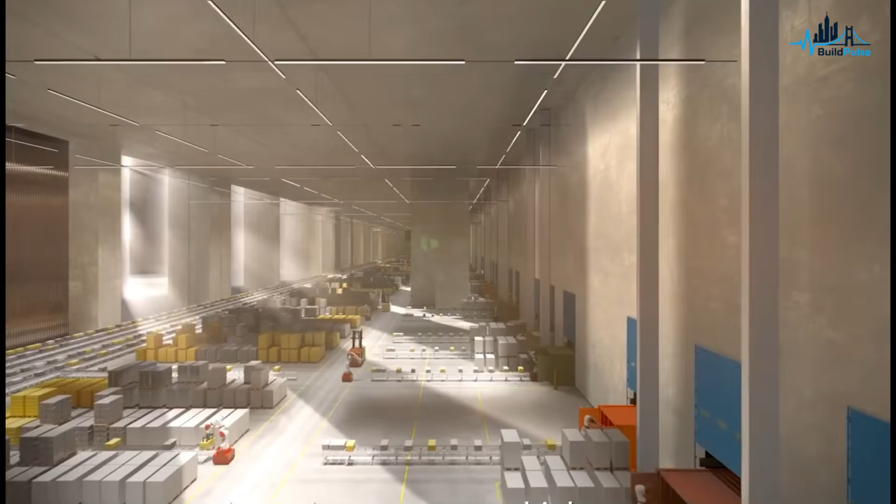Imagine trying to build a futuristic city in a place where the first problem is not traffic, it is not housing, it is not skyscrapers, it is water. For years, NEOM has been sold as one of the boldest construction visions on Earth.

But every render hides the same question: where does the water come from? Because in this part of the world, water is not something a city simply receives from nature. It has to be produced, powered, moved through long pipelines, stored, recycled, monitored, and protected. And whatever is left behind has to be controlled before it damages the very sea that made the whole project possible. That means NEOM's most important megaproject may not be the Line. It may be the invisible machine beneath it.

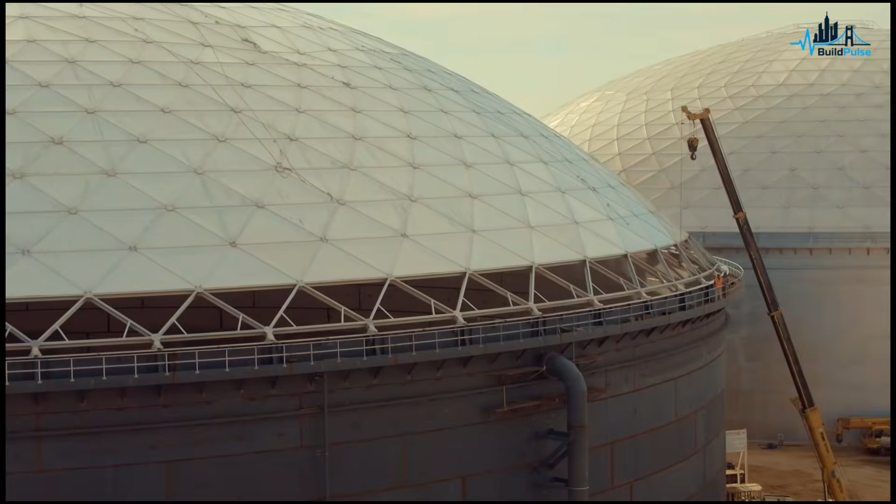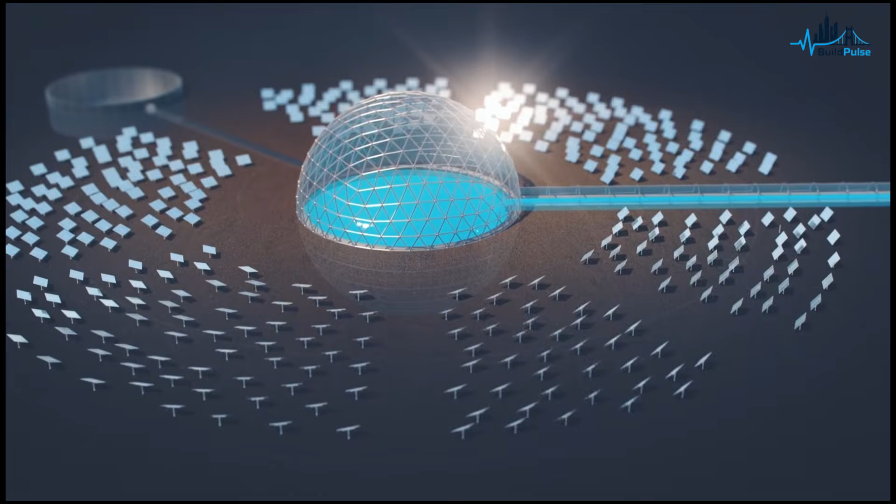Desalination plants, renewable power, reservoirs, pumping stations, wastewater recycling, and brine treatment. And if that machine falls behind the city's ambition, the future does not simply slow down, it runs dry. This is the story of NEOM's $500 billion desert city, and the water system that decides whether it becomes a model for the future or the world's most expensive mirage.

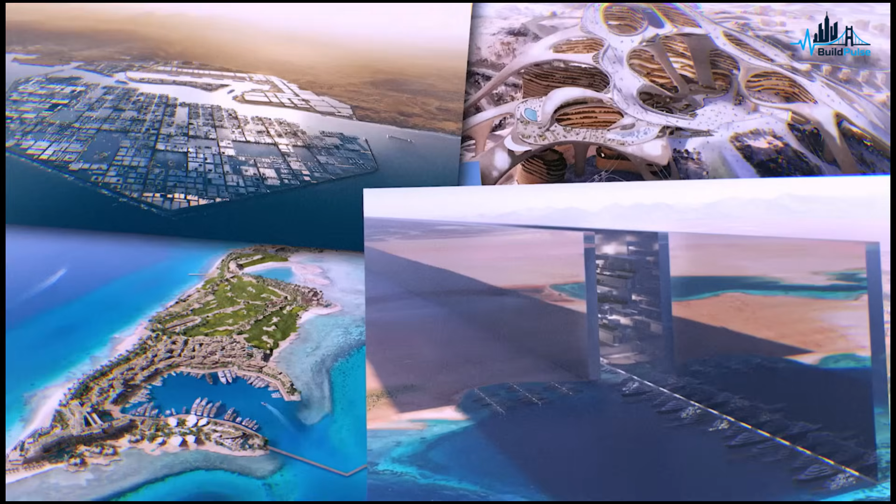Before we get into the system, we have to separate the dream from the plumbing. NEOM is not one building, it is not even one city. It is a planned region on the northwest coast of Saudi Arabia along the Red Sea, designed to include several major developments: the Line, Oxagon, Trojena, Sindalah, Magna, and the infrastructure needed to connect them. The most famous piece is the Line, a proposed linear city stretching 170 kilometers, only 200 meters wide, and rising 500 meters above sea level. It is the image everyone remembers: two mirrored walls cutting through the desert like a blade.

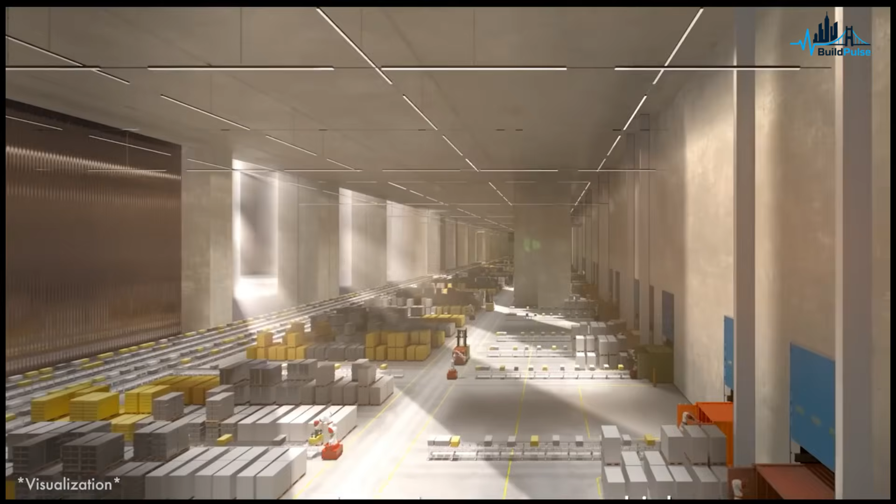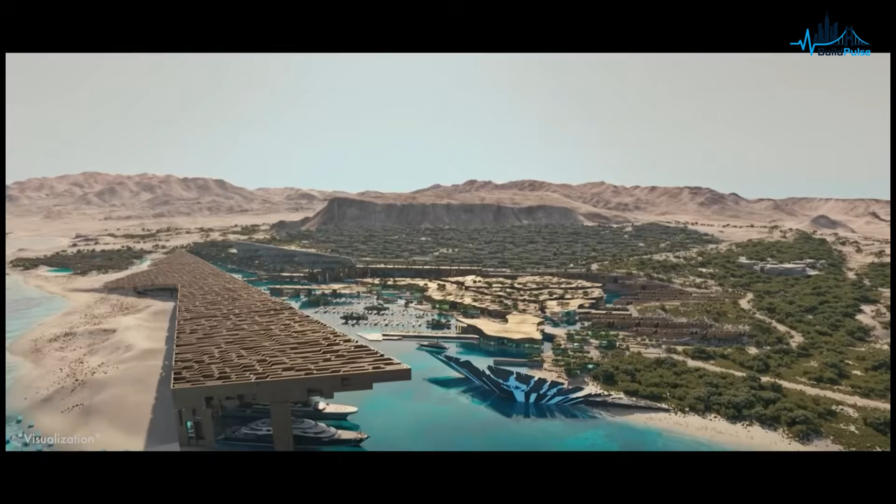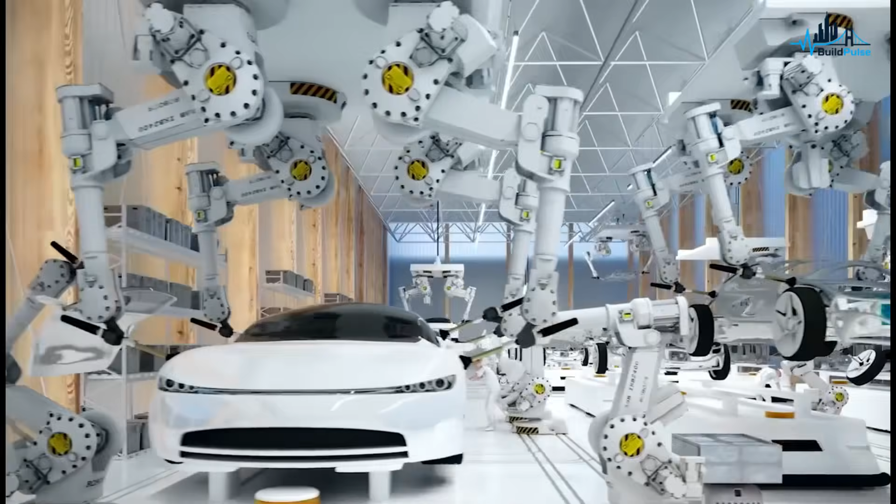But NEOM is bigger than that single image. It includes industrial zones, coastal tourism, mountain development, ports, energy projects, airports, roads, utilities, and a whole new economy that Saudi Arabia wants to use as part of its post-oil future. The marketing language is seductive: renewable energy, walkable neighborhoods, zero-emission transit, artificial intelligence embedded into daily life, advanced manufacturing, a new relationship between cities and nature.

But all of that depends on something much older than any smart city: a reliable water cycle. And this is where NEOM's story diverges from almost every traditional city. Most cities grow around water: rivers, aquifers, reservoirs, lakes, seasonal rainfall, snowmelt, or regional supply networks usually arrive first, and the city organizes itself around them. Even cities in dry climates often inherit something: groundwater reserves, imported water systems, older reservoirs, or decades of existing pipes.

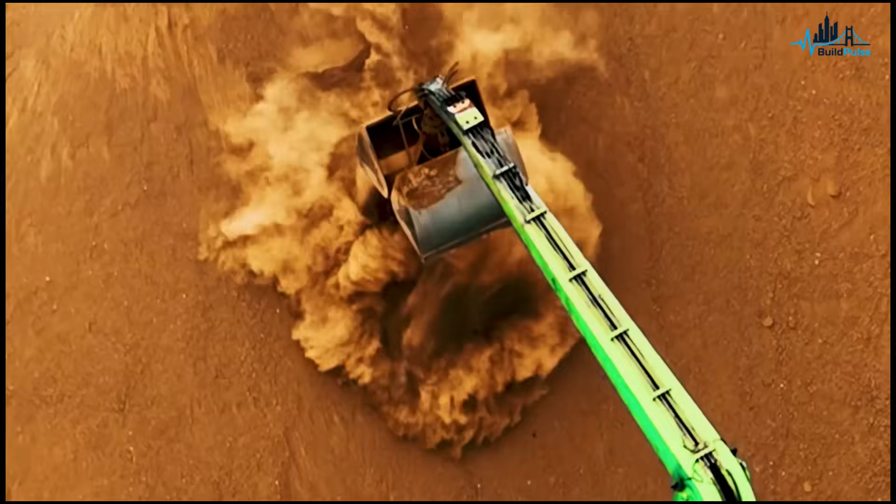NEOM is different. It is being built in one of the driest regions on Earth, where natural freshwater is extremely limited. Rainfall can be measured in only a few dozen millimeters in many years, and there are no permanent rivers to build around. So the water plan is not a supporting document inside the master plan. It is the master plan.

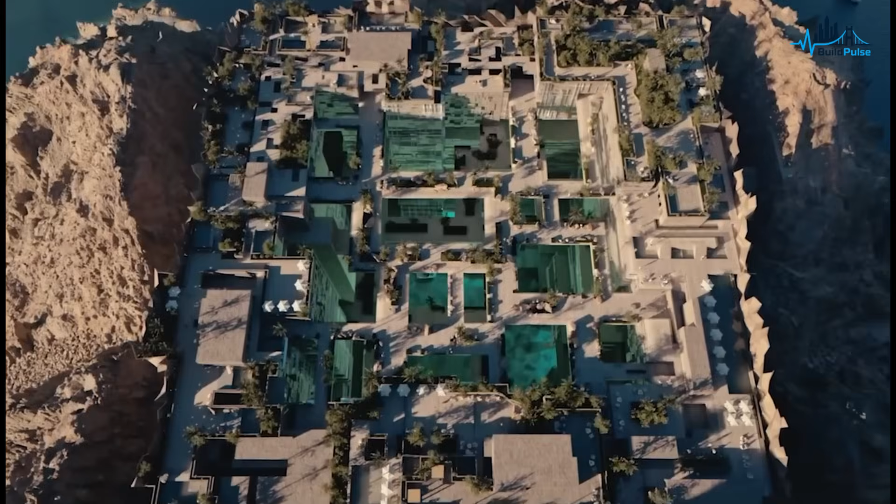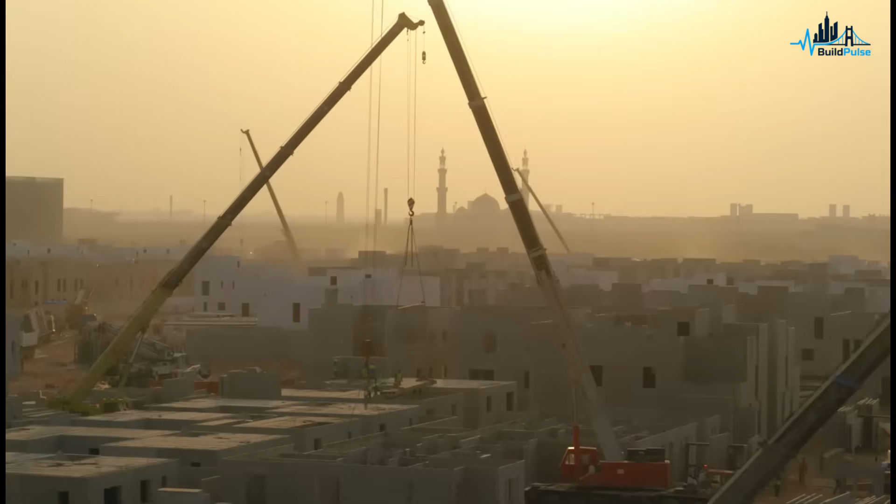Because a city can postpone a museum. It can delay a district. It can redesign a tower, cut a hotel wing, or move a stadium entrance. But it cannot negotiate with daily water demand. The moment people move in, hotels open, construction work accelerates, and industry starts operating, the system has to behave like reality, not like a plan in a book.

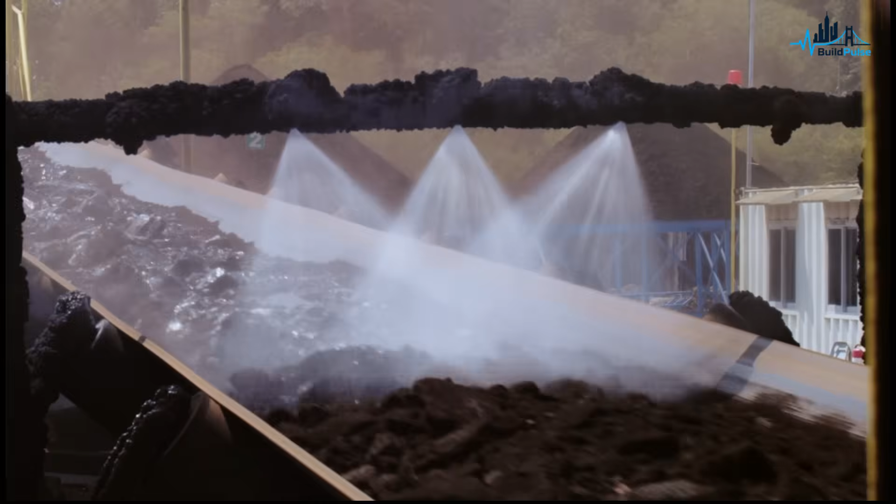The taps have to open. The toilets have to flush. The cooling systems have to run. Construction dust has to be suppressed. Emergency reserves have to be ready before the emergency arrives.

That is why water is the perfect test of NEOM. Strip away the glass facades, the price tag, the geopolitical ambition, and the architectural renders, and what remains is a simple, ancient, unforgiving question: Can enough water be made, moved, stored, and reused reliably every day at city scale in one of the driest places on Earth?

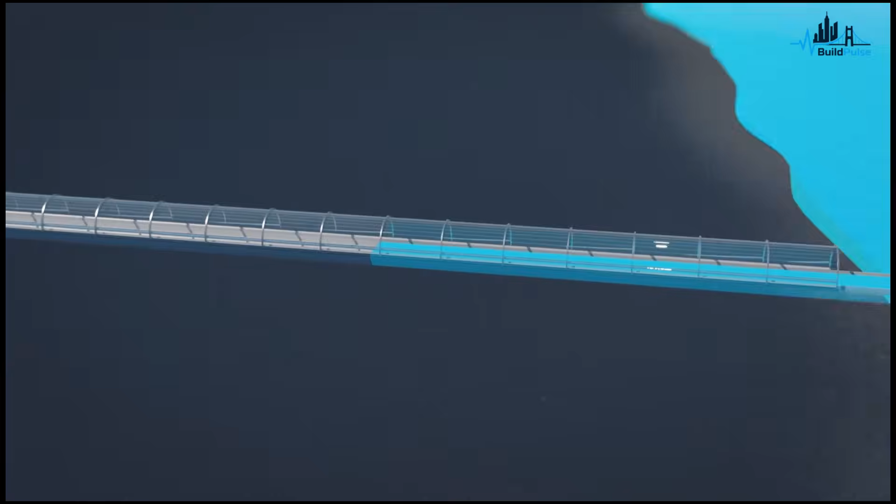NEOM cannot simply find that water. It has to manufacture it. And that is the first revelation. NEOM's water supply is not a source, it is a factory. NEOM's own water plan is built around desalination powered by renewable energy.

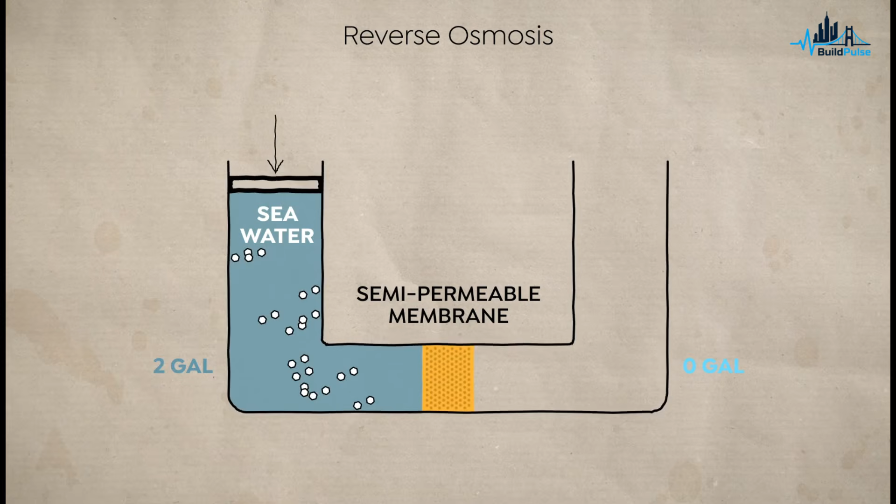In simple terms, seawater from the Red Sea is pulled into a treatment system. Dissolved salts are removed through advanced filtration and membrane processes, and fresh water comes out the other side. On a diagram, it looks clean: sea in, fresh water out, city supplied.

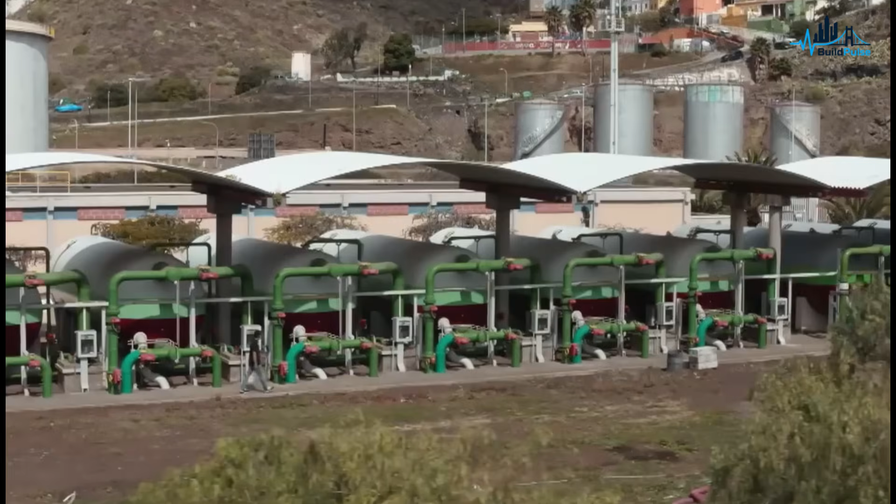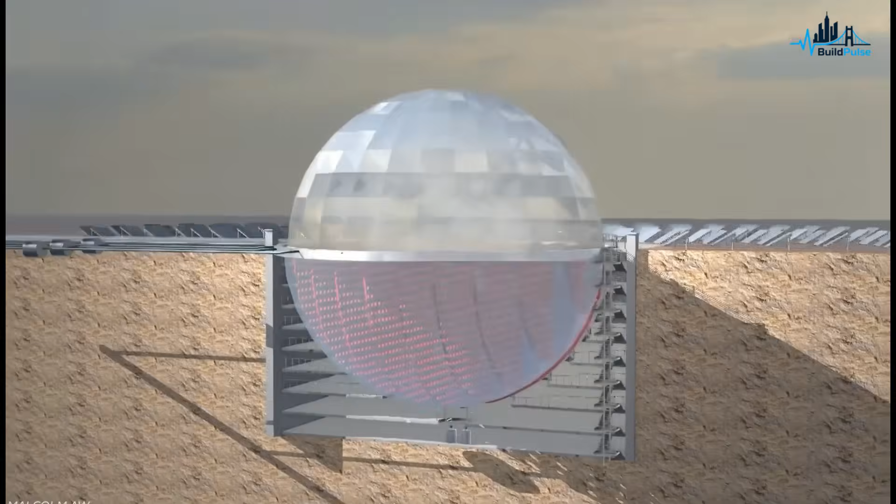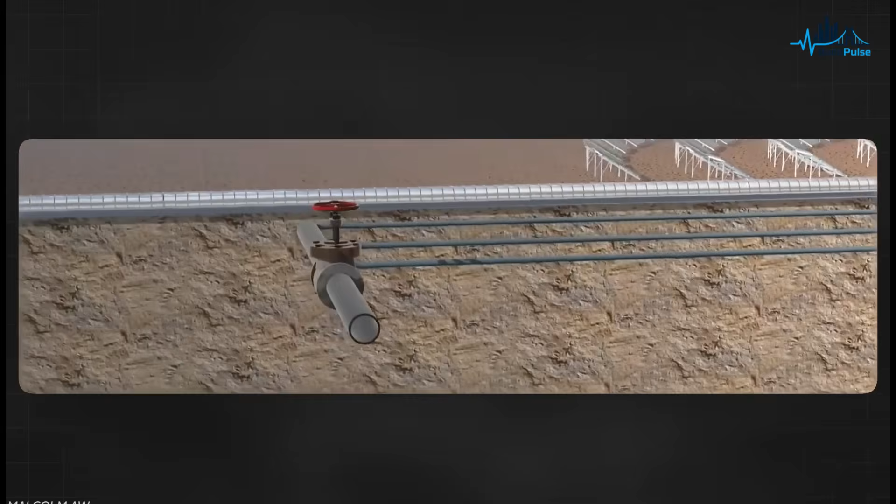But in a desert at city scale, that simple diagram becomes one of the most demanding industrial operations on the planet, because desalination is not a tap you turn on. It requires intakes that bring seawater in while limiting marine damage. It requires membranes, pumps, filters, chemicals, operators, monitoring systems, spare parts, maintenance crews, and continuous power. Then the finished water has to be moved inland through pipelines, pumped through pressure zones, held in reservoirs, protected from contamination, and delivered with enough reliability that a failure does not become a crisis.

And then comes the part almost nobody puts in the render: brine. When you remove salt from seawater, the salt does not disappear. It becomes a concentrated leftover stream. And if that stream is handled poorly, it can raise local salinity near the discharge point and stress marine ecosystems.

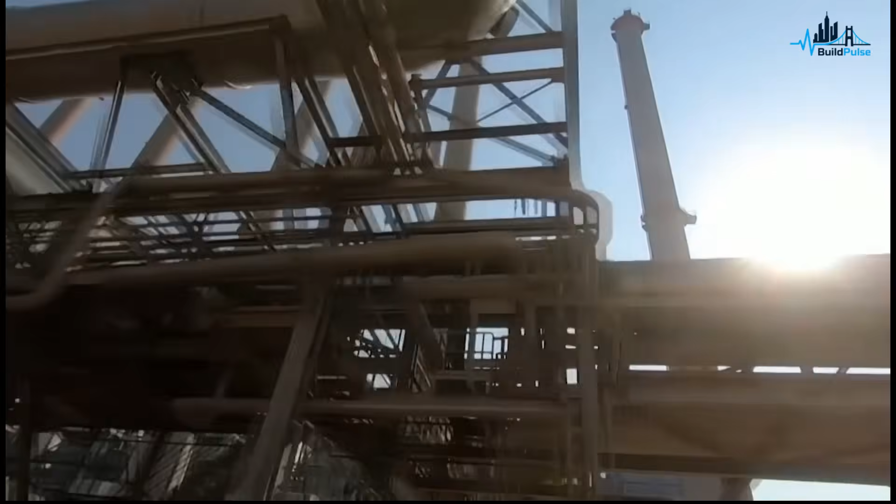That matters because NEOM is not drawing from an empty bathtub. It is drawing from the Red Sea, a marine environment known for coral reefs and ecological value. So NEOM's plan does not treat brine as a detail. It treats brine as one of the central engineering problems. The idea is to process it, recover useful minerals and materials from it, and reduce the amount of waste that returns to the sea. NEOM has also promoted pilots, including brine-based concrete, and partnerships around brine valorization. That is ambitious. It is also the right problem to focus on.

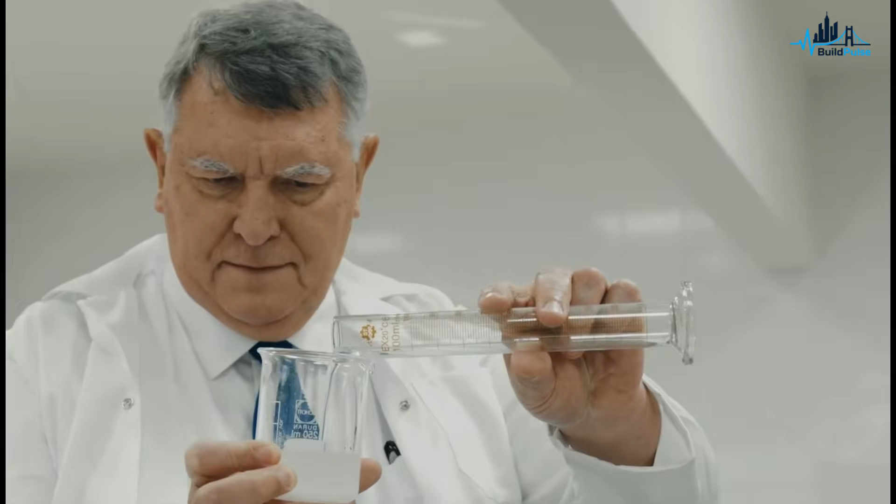Because if NEOM is going to market itself as a sustainable desert city, it cannot simply copy the old model of desalinating water and pushing the difficult part out of sight. It needs a cleaner loop.

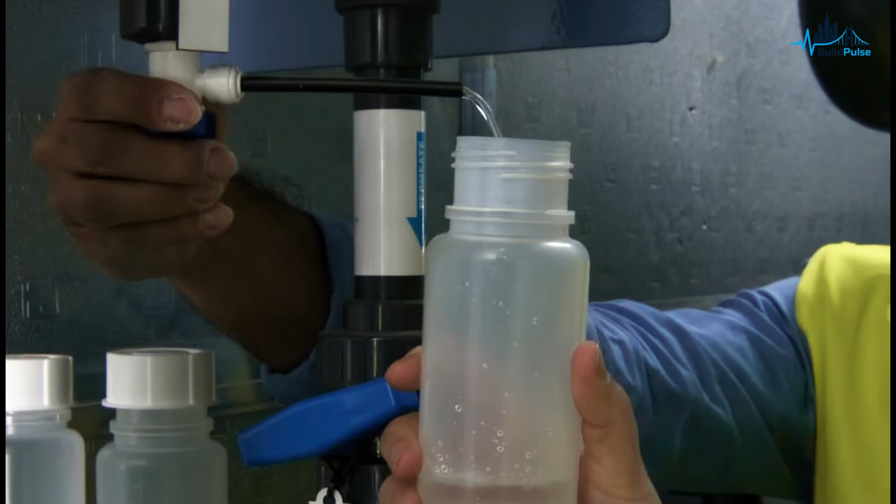That loop has 4 steps. First, make fresh water from seawater. Second, power the process with renewables. Third, recycle wastewater back into useful water. Fourth, manage or recover the brine so the Red Sea does not become the hidden cost of the city.

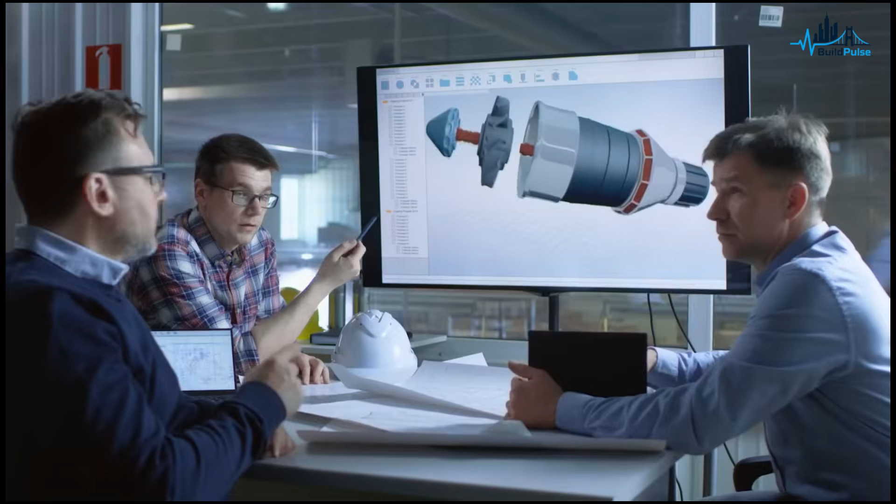If those 4 steps work, NEOM becomes a laboratory for future arid cities. But if one fails, everything gets harder. Because here, water is not just another utility. Water is life support, and life support has to work every day.

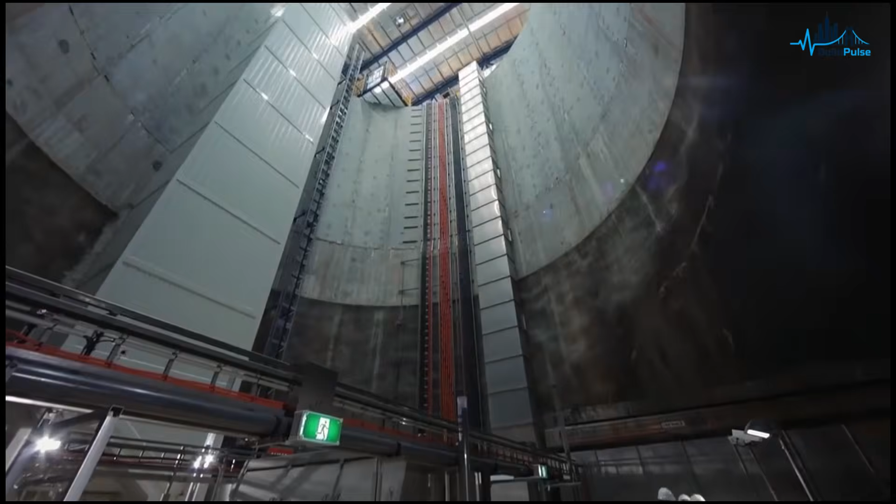That brings us to the second layer of the problem. Saudi Arabia already knows desalination. The kingdom is one of the world's great desalination powers, and desalinated water already supplies a major share of its domestic drinking water. So the question is not whether Saudi engineers understand how to remove salt from seawater. They do. The real question is whether NEOM can build a new version of desalination that is larger, cleaner, more integrated, and synchronized with a city that is still changing shape.

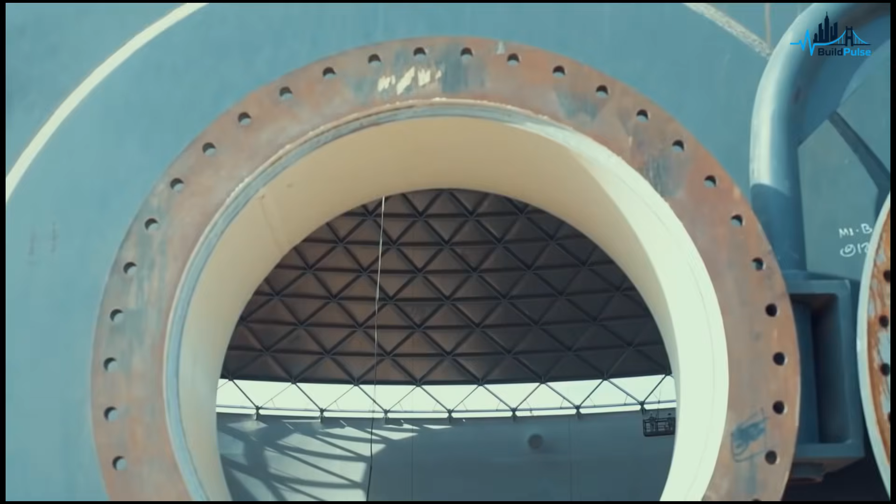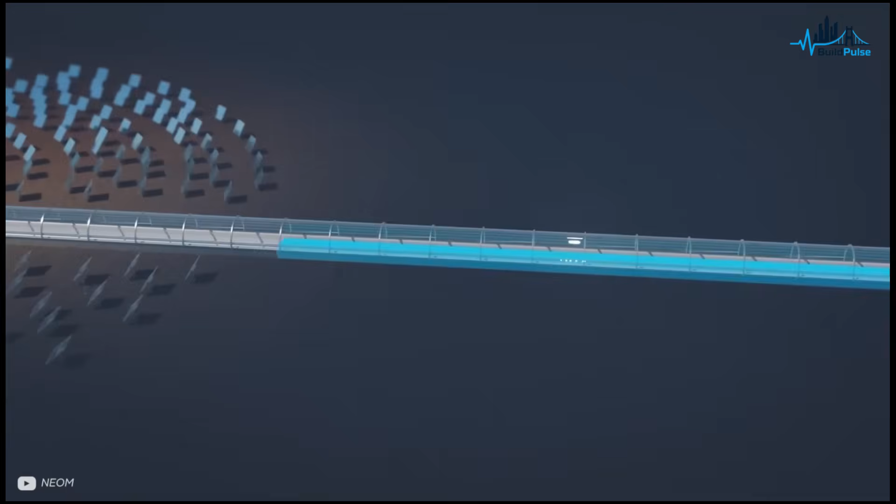That is much harder. The numbers are huge. NEOM has described a smart water network stretching hundreds of kilometers from coast to desert, major reservoirs, pumping stations, wastewater recycling, and brine processing built into the system from the beginning. It has also reported real progress: transmission pipelines already laid, storage assets built, pumping stations installed, and potable water production already operating.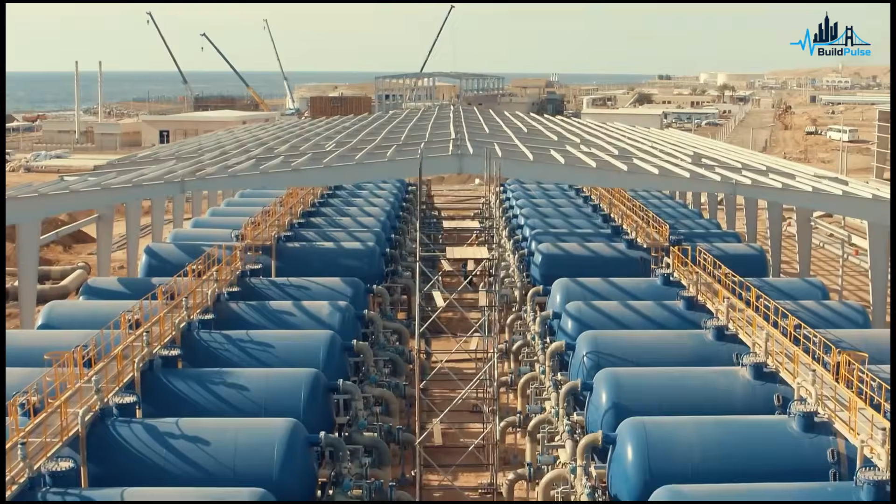So this is not just a concept slide. Parts of the water machine exist. But the distance between what is operating today and what a populated city demands tomorrow is the real story.

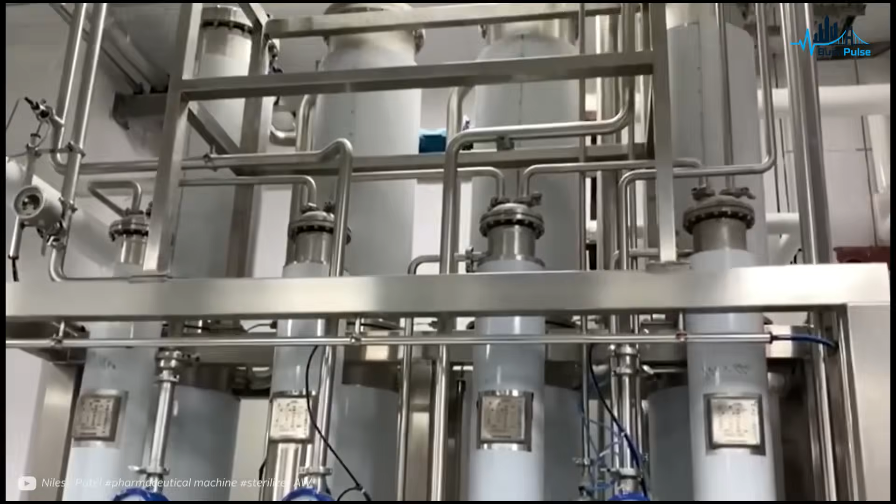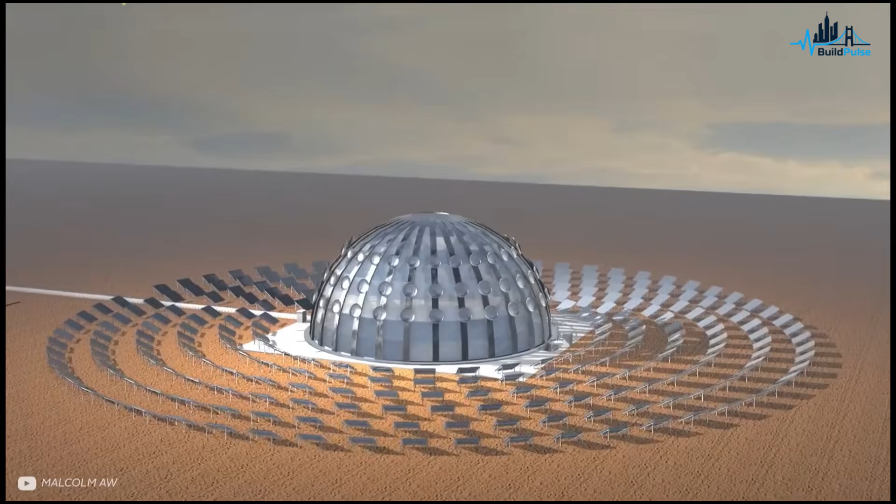A desalination-dependent megacity needs 3 things at once. First, it needs continuous power. If power supply falters, water production can falter with it. Renewable energy is not just an environmental promise here, it becomes the fuel line for daily life.

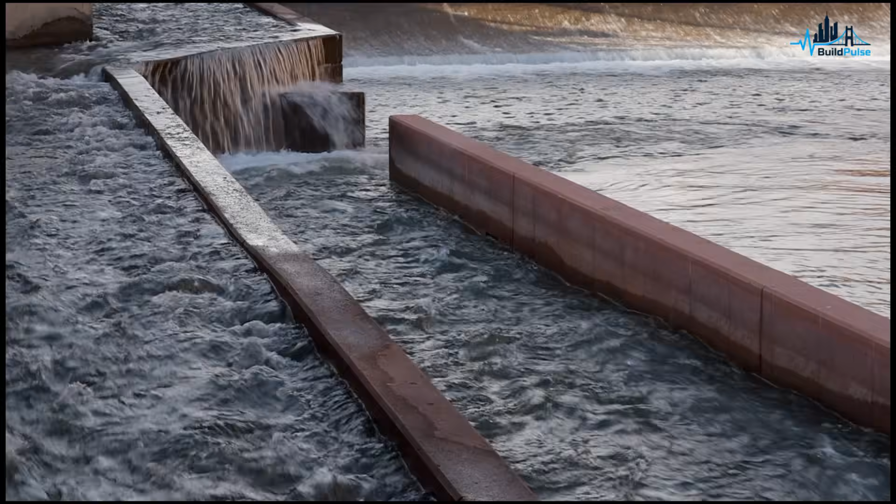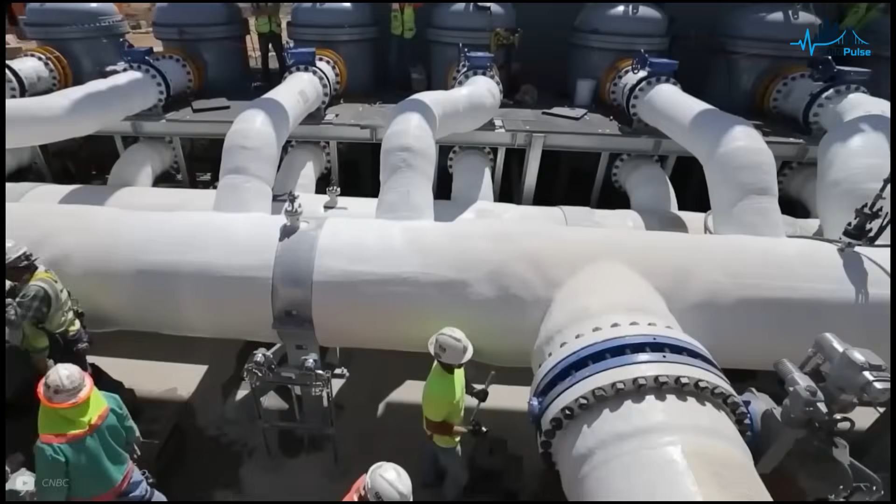Second, it needs redundancy. A normal city may be able to absorb failure through older networks, backup reservoirs, or regional water transfers. A new desert city has to design its safety margin from the start: storage reservoirs, alternate routes, spare capacity, emergency pumping, and the ability to isolate a failure before it cascades.

Third, it needs timing. Water infrastructure has to arrive before demand does, not alongside it, before it.

But megaprojects are always tempted by visible progress: the towers, the stadiums, the hotels, the transit systems, the images that prove momentum to the world. Pipes are not that image. Reservoirs do not go viral. Brine processing plants do not sell the dream. But without them, the dream is fragile.

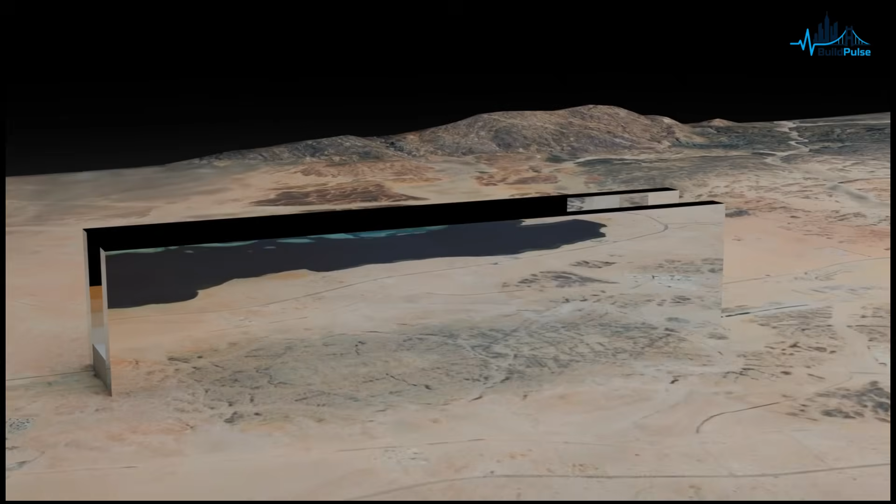That is why recent reporting around NEOM matters. The long-term image of the line is a 170-kilometer city for millions of residents. But reporting has described a much smaller initial focus, with work concentrated around an early stretch and major event-linked deliverables. That does not mean the whole project is dead. It means the project is entering the discipline phase, and water infrastructure is where discipline becomes unavoidable.

Because water does not care about master plans. It only cares whether the capacity exists when demand arrives.

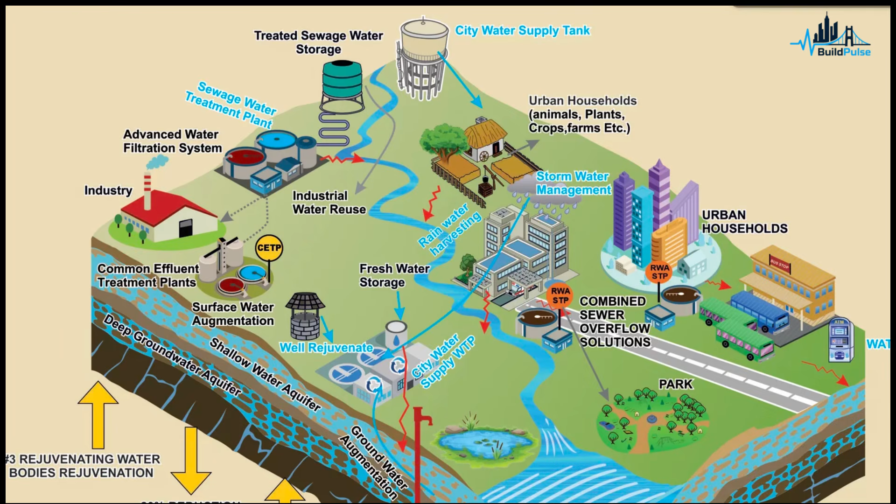Now there is a second revelation hiding inside the shape of the line itself. Even if NEOM can make enough water, it still has to move that water through a city shaped like a spine. A traditional city is messy, but it is usually clustered.

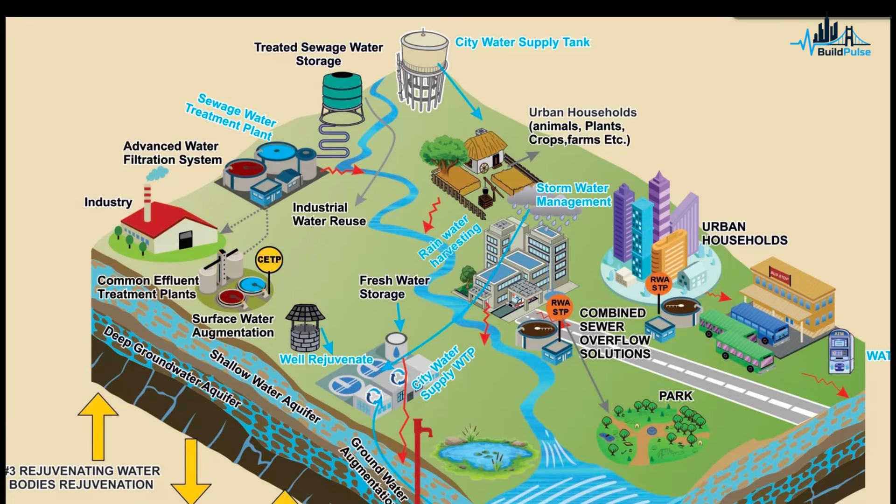Water mains branch out, loop around neighborhoods, and create a network. If one area fails, another route may help. If demand spikes in one district, nearby systems can sometimes support it.

The line is different by design. It is long, narrow, and linear. That geometry may save land. It may concentrate services. It may create new possibilities for transit, density, and energy distribution.

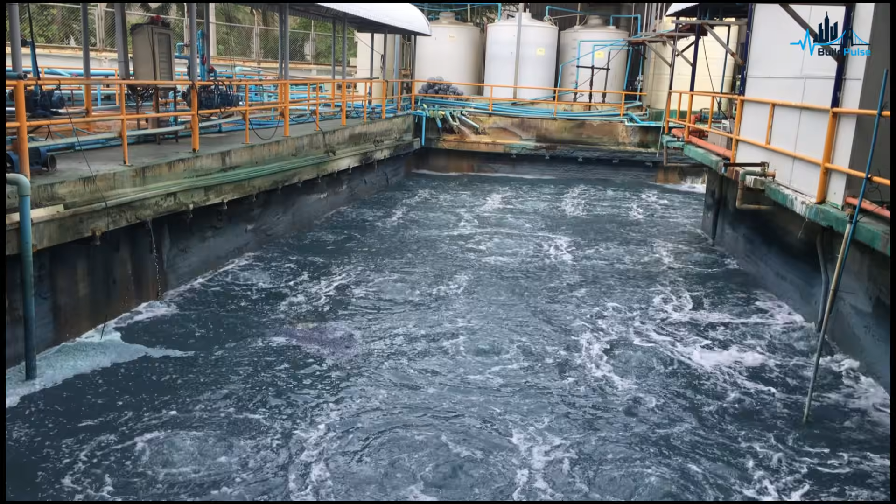But for water, it creates a supply chain problem. Imagine feeding a city through a long body. The source is near the sea. The city stretches inland. Every segment needs pressure, storage, monitoring, fire flow, drinking water quality, wastewater collection, and recycled water networks.

A failure at one point is not just a local inconvenience. It can become a severance.

So engineers need a spine with backup arteries. They need district storage nodes. They need pressure zones. They need sensors that can find leaks fast. They need valves that can isolate trouble without cutting off an entire district. And they need enough reserve that maintenance does not become a public crisis.

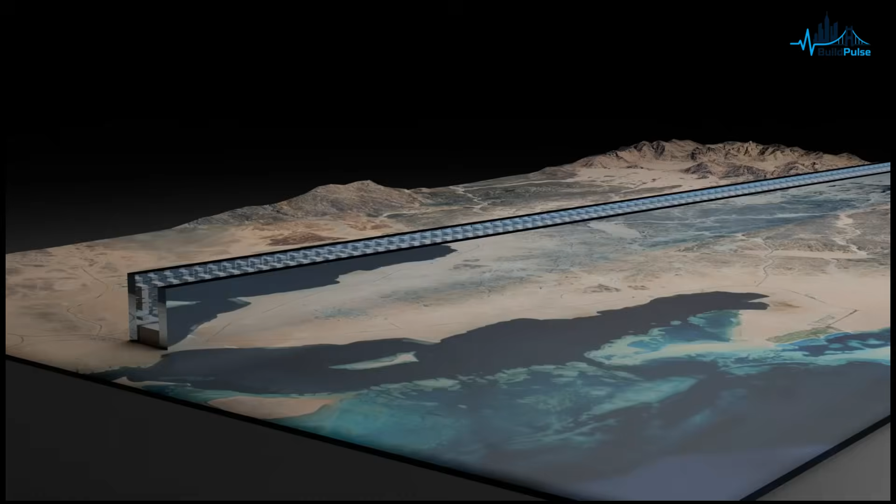This is the unglamorous side of futuristic urbanism. A linear city looks simple from the air. But under the surface, it may need one of the most carefully staged utility networks ever attempted.

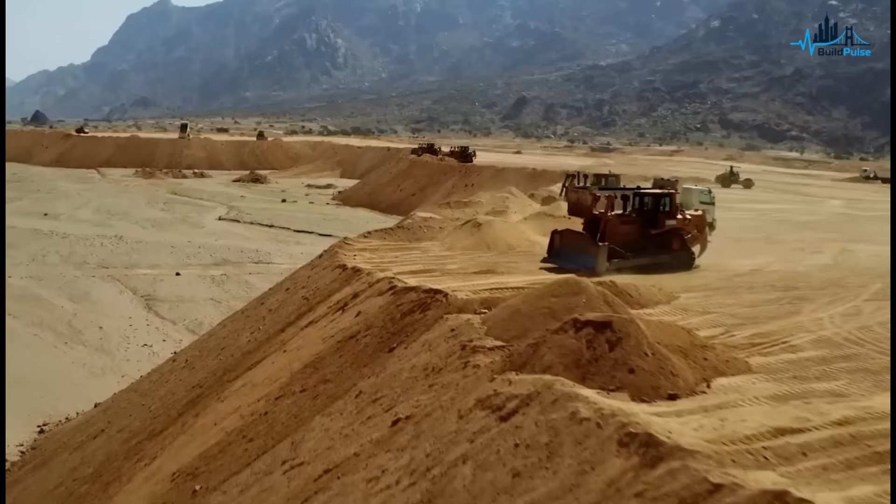And construction adds another twist. NEOM needs water before NEOM is fully inhabited. Before millions of residents arrive, construction camps need water. Concrete work needs water. Dust suppression needs water. Workers need sanitation. Equipment needs cleaning.

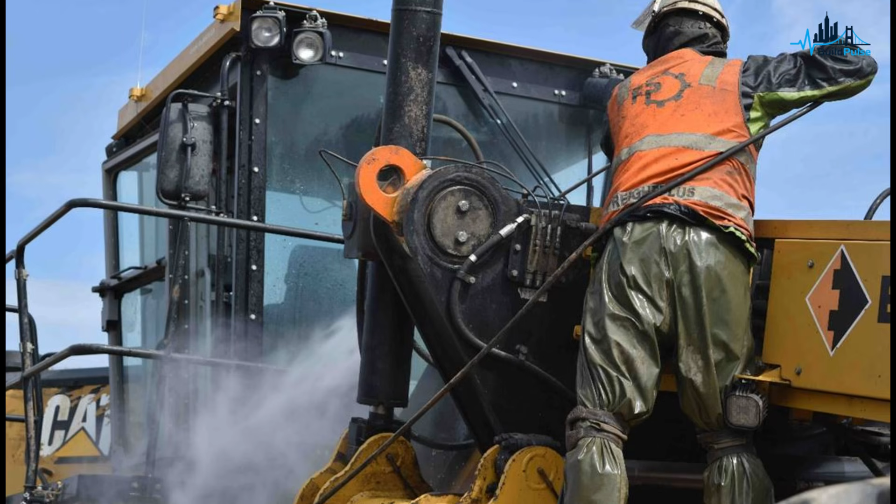Temporary roads, batch plants, landscaping trials, ports, and early tourism assets all create demand before the city produces revenue at scale. That means the water machine has to grow ahead of the city, not alongside it, not behind it, ahead of it. That is expensive even in the best conditions.

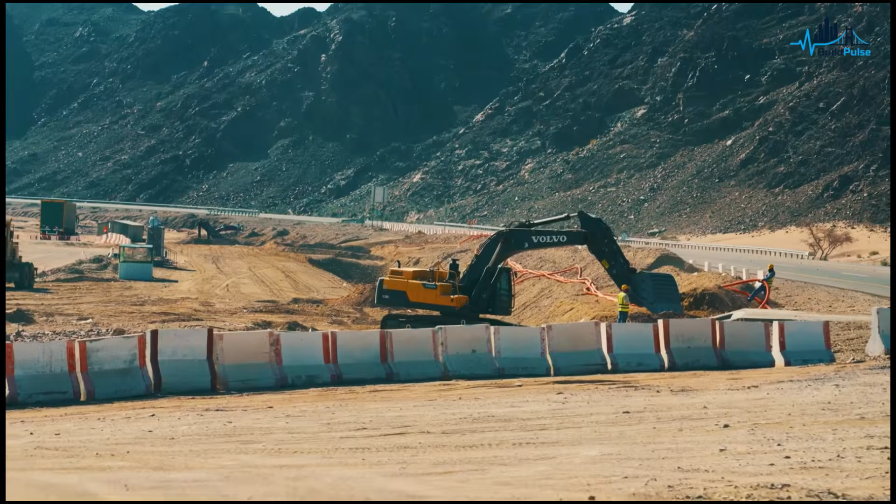In a restructuring megaproject, it becomes even more delicate because every early dollar spent on hidden infrastructure is a dollar not spent on something the public can see. But if the hidden infrastructure is delayed, visible progress becomes dangerous.

This is why recent water infrastructure reporting matters. Industry coverage in 2026 reported that NEOM had canceled a planned desalination plant known as Moonlight, which had been planned at 150,000 cubic meters per day as part of broader restructuring. At the same time, NEOM continues to promote long-term high-capacity desalination, brine processing, and water reuse goals.

Those two facts can exist at the same time. The ambition remains massive. The path is being adjusted. And for a water-dependent city, every adjustment affects the sequence.

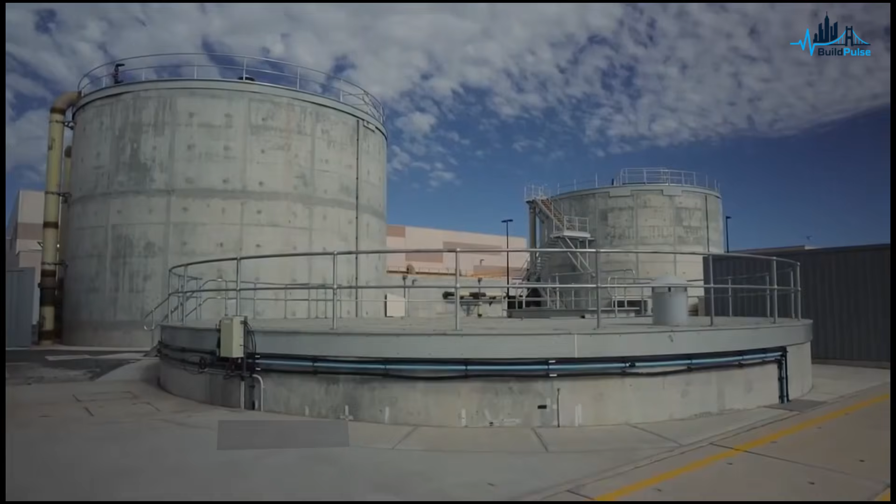That brings us to the third revelation. NEOM's greatest water risk is not that desalination is technically impossible. The technology exists. The engineering knowledge exists. The risk is simpler and more dangerous. Demand could outrun the machine.

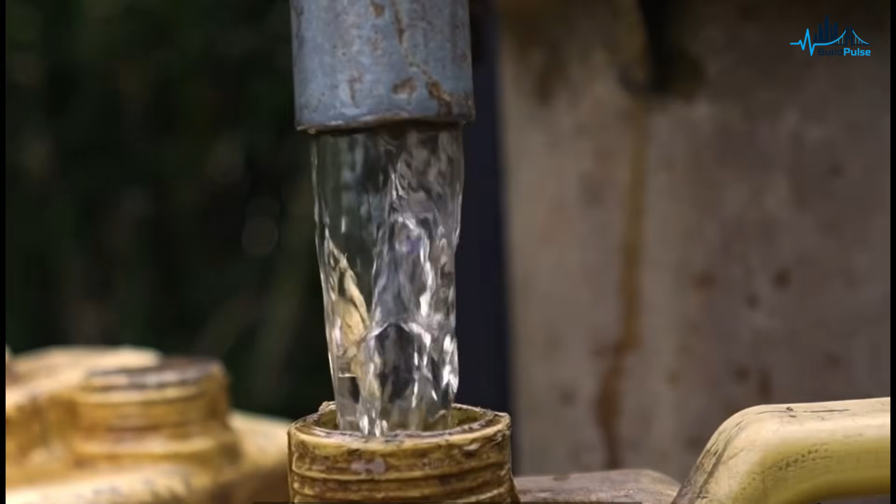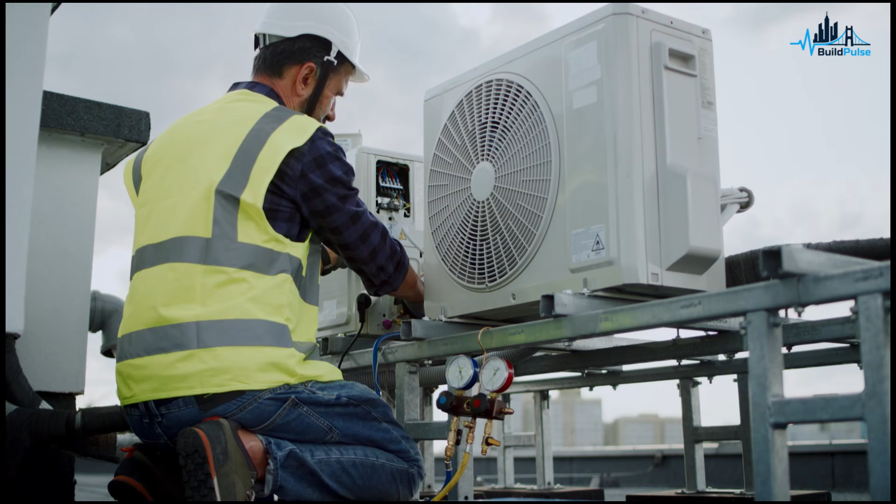Every growing city generates a demand curve. More residents mean more drinking water. More industry means more processed water. More landscaping means more irrigation. More hotels mean more cooling demand. That curve rises continuously. It does not wait.

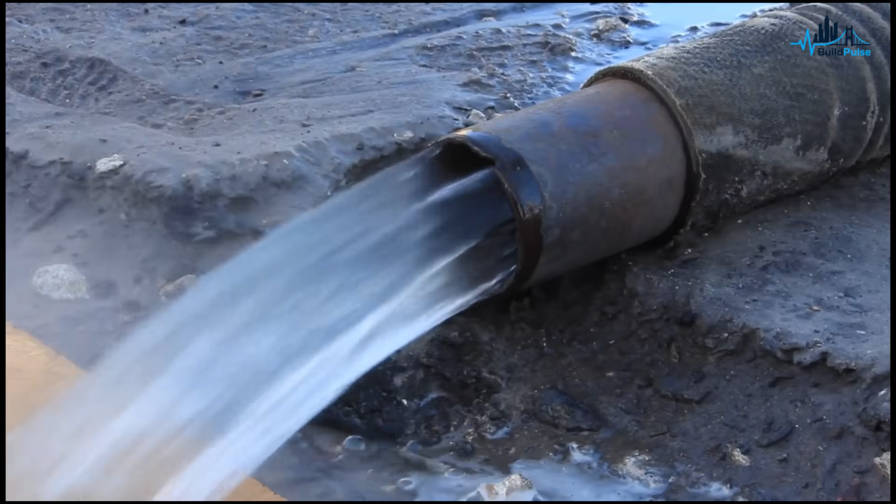But NEOM's water supply has its own curve, and that curve moves slowly. Desalination capacity has to be tendered, financed, engineered, permitted, built, tested, connected to power, connected to the pipe network, staffed with trained operators, and brought online carefully.

Power projects have to be ready, pipelines have to be laid, reservoirs have to be filled, wastewater plants have to be commissioned. Brine systems have to prove they can work beyond pilots and reach the scale of the desalination system they support. If the city curve rises faster than the water curve, the result is not theoretical.

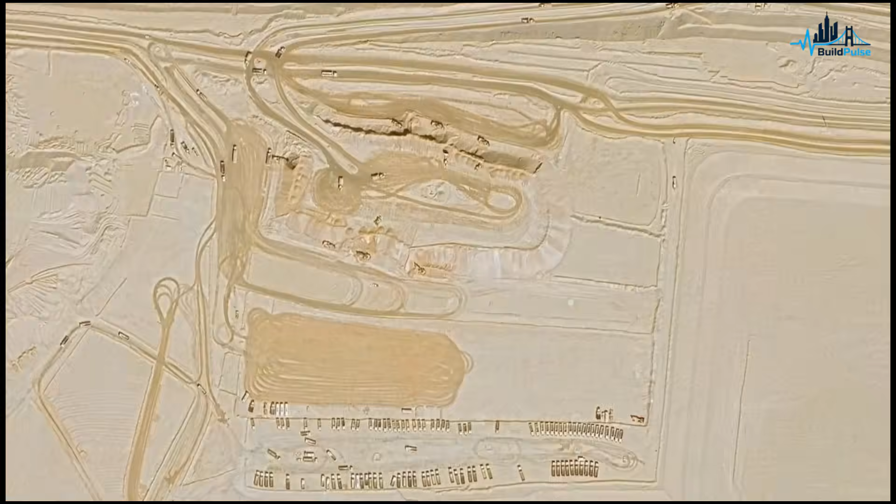It is rationing, delays, construction bottlenecks, or a forced slowdown. This is the physical wall behind the financial wall.

Money can accelerate many things. It can hire more people, buy equipment, and move deadlines forward. But water infrastructure has dependencies.

A desalination plant cannot deliver water to a district that has no pipeline. A wastewater recycling plant cannot recycle water that has not been collected. A brine recovery system cannot claim environmental success if it has not reached the scale of the desalination system it supports. Everything must connect, and everything must connect in order.

That is the engineering tension at the center of NEOM. This is why runs dry is not a prediction that NEOM has already failed. It is the pressure test. It is the question every arid megaproject has to answer before the opening ceremony.

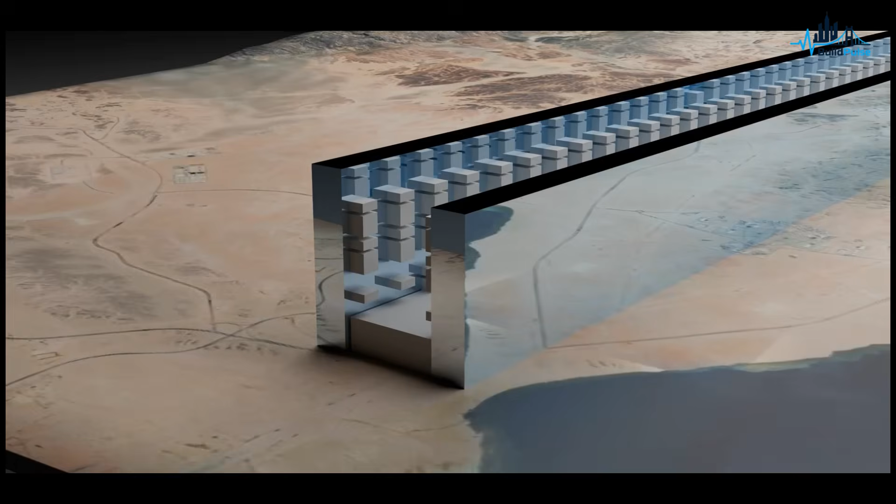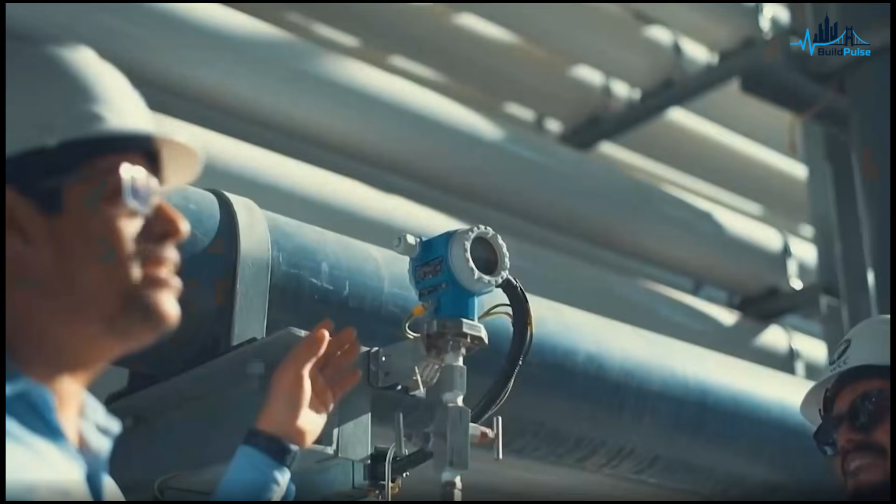Can the water system scale at the same speed as the dream, without pushing the cost into the ocean, the grid, or the next phase? The public sees the mirror wall. Engineers see the sequence: water first, power first, storage first, distribution first, wastewater first, brine first. Only then can the futuristic city behave like a real city.

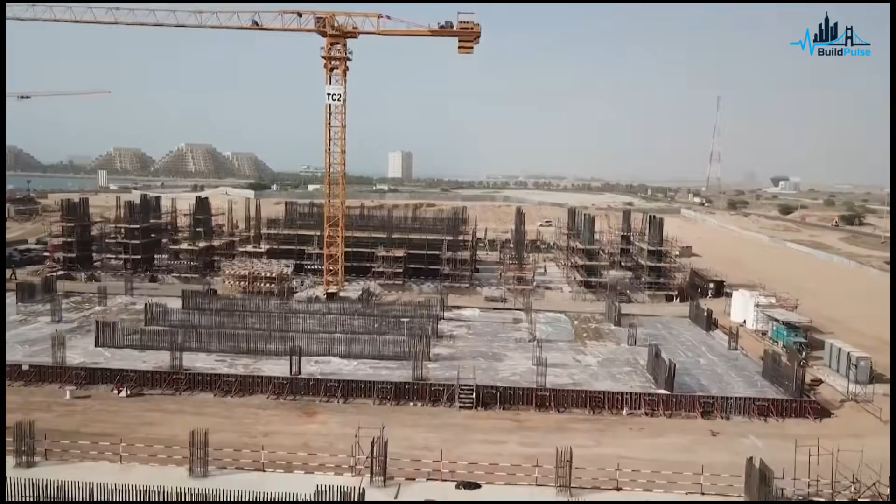This is also why phasing matters so much. A shorter first phase may make the project more manageable. It concentrates demand, reduces immediate distribution length, and gives engineers a smaller system to prove before the full vision expands. But it also changes the narrative. The question becomes less, can they build 170 kilometers quickly? And more, can they prove the first piece works well enough to justify the next piece? That is a very different test.

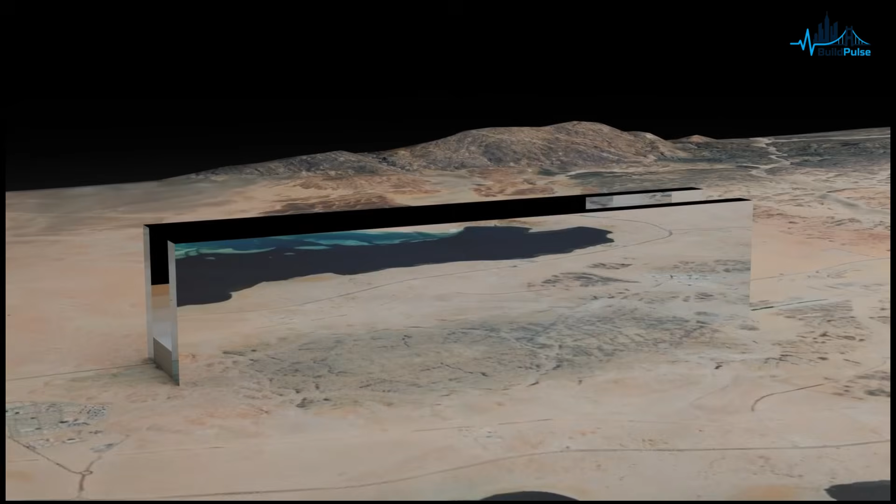There is also a public perception trap here. When people hear that a first phase is smaller, they often assume the engineering problem shrinks in the same proportion. But utility systems do not shrink that neatly. Even a short first phase needs the basic skeleton: intake, treatment, power, storage, distribution, wastewater collection, brine handling, and emergency planning. You can reduce the length of the city. You cannot remove the need for a complete water cycle. And the test is not only architectural, it is hydrological.

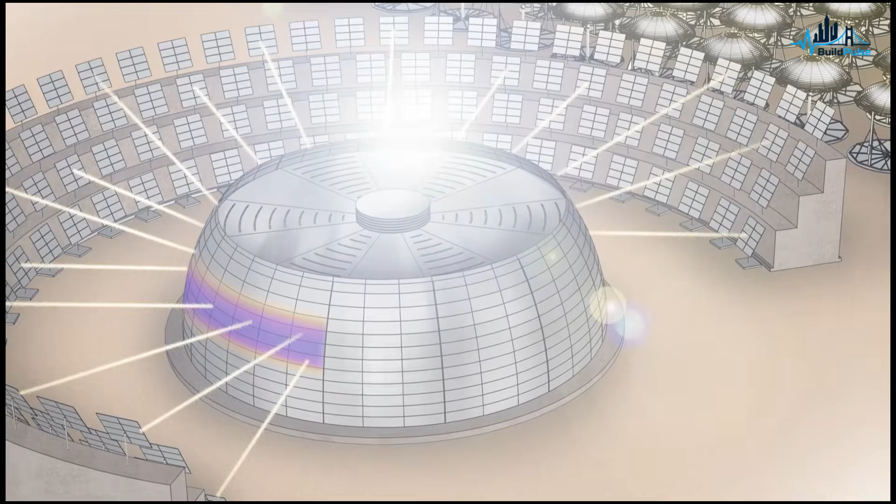Now the whole picture comes into focus. Not the vision, the system. NEOM's water infrastructure is a machine with 4 gears. Gear 1, make water. Desalination is the source. Without it, the desert city has no reliable base.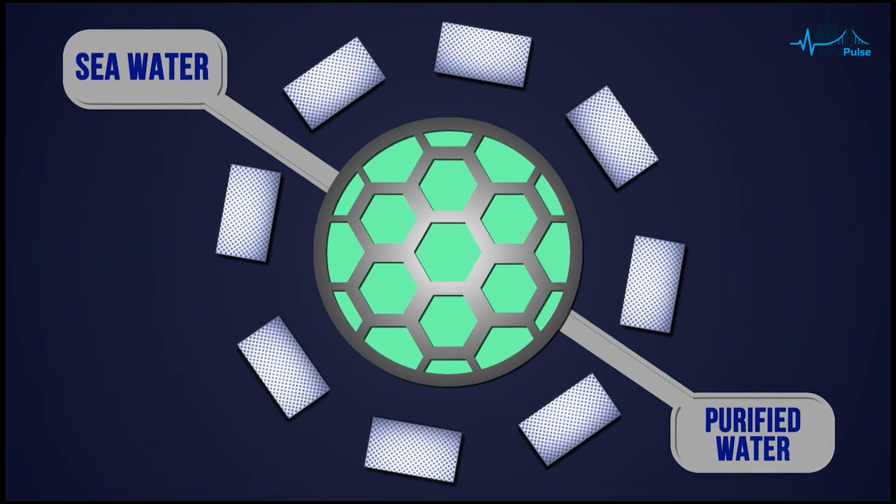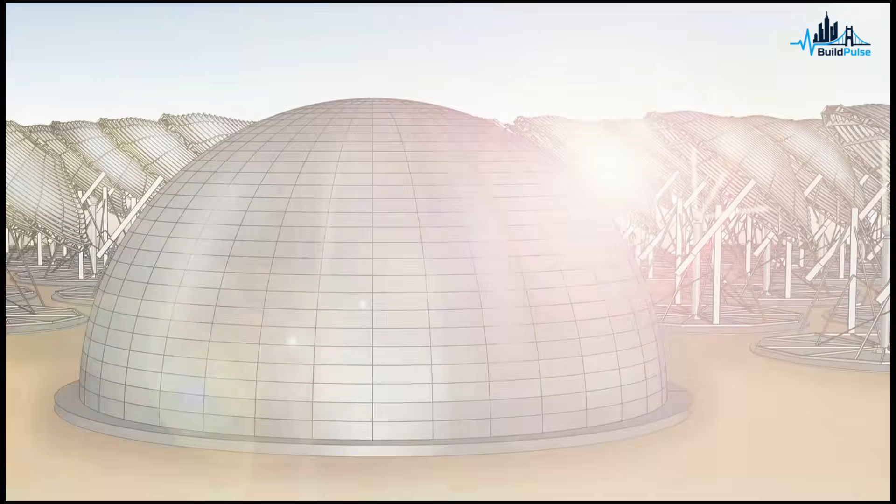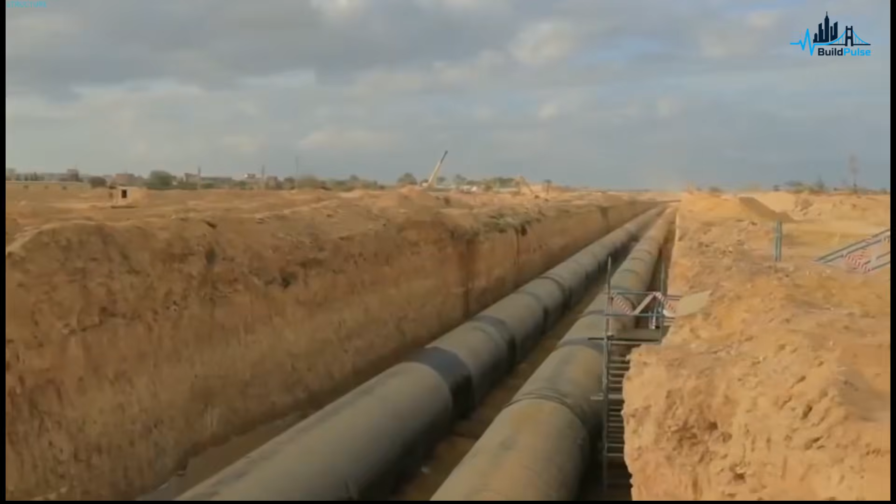Gear 2, power water. Renewables are not decoration. They keep the water stream moving. If the energy system is unstable, the water system needs storage and backup strong enough to absorb the shock. Gear 3, move water. The line's geometry turns distribution into a mega infrastructure problem.

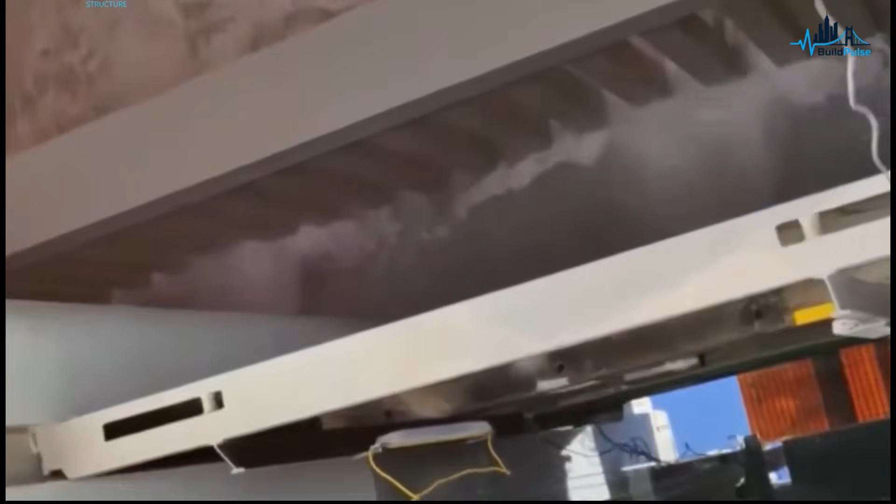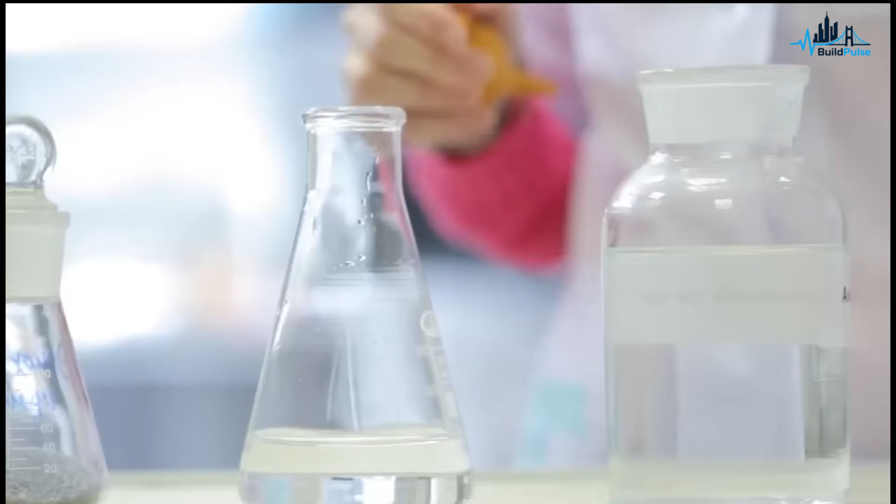Long pipes, pressure zones, pumping stations, reservoirs, valves, sensors, and redundancy. Gear 4, close the loop. Wastewater recycling and brine recovery are what turn the project from a desert survival plan into a sustainability claim. When all 4 gears turn together, the concept becomes powerful. NEOM could become a working example of how a coastal desert city can grow without draining inland aquifers, without treating the ocean as a waste sink, and without making fresh water depend entirely on old fossil fuel systems. That would matter far beyond Saudi Arabia, because NEOM is not the last desert city that will ever need water.

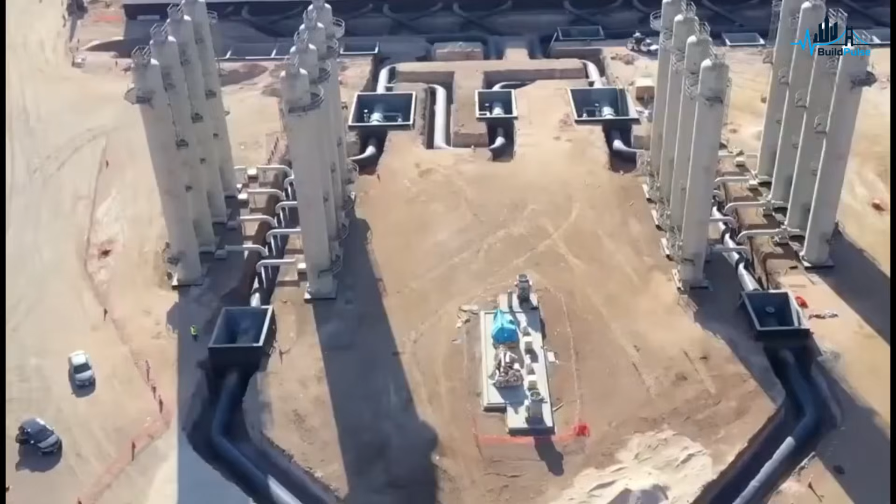But when one gear slips, the whole machine feels it. Too little power and desalination slows. Too little storage and a disruption becomes a shortage overnight. Too little recycling and demand climbs faster than supply. Too little brine control and the Red Sea becomes the price of the city. Too little phasing discipline and demand outruns capacity.

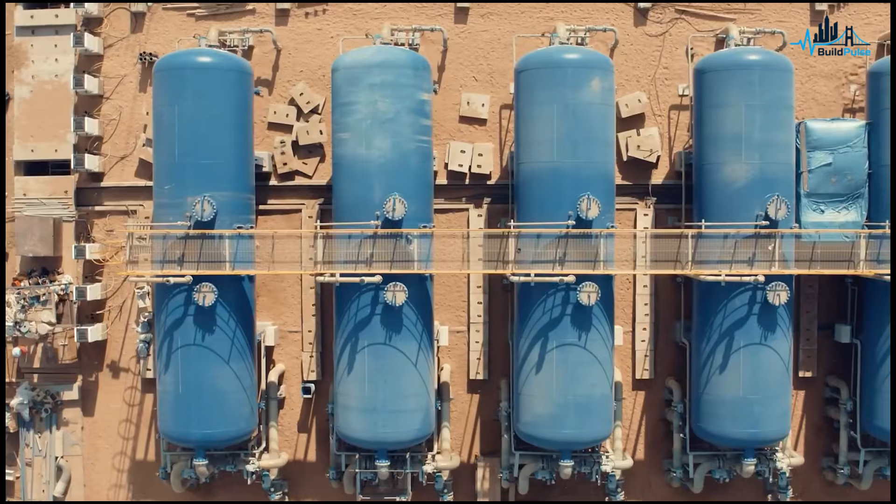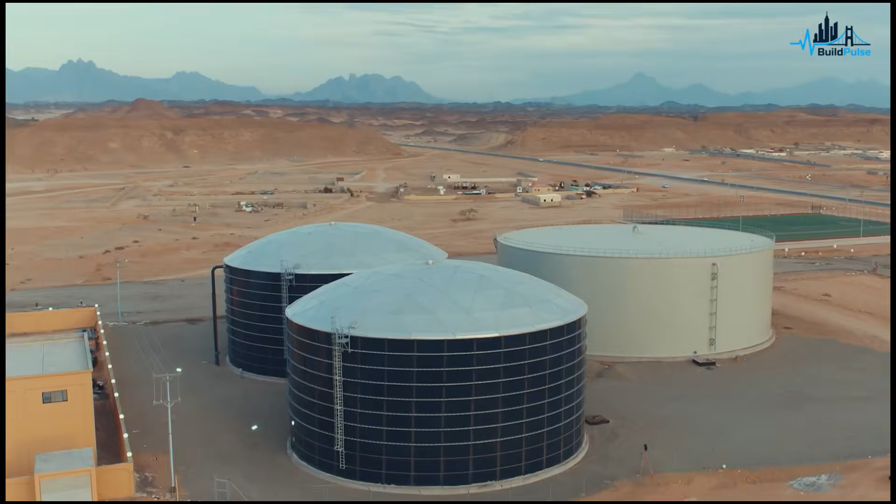That is why the real NEOM story is not just about whether a mirrored city can be built. It is about whether a man-made water cycle can be built fast enough, cleanly enough, and reliably enough to support it. The future city does not begin with a skyline. It begins at the intake. It begins where seawater becomes drinking water. It continues through pipes, pumps, reservoirs, treatment plants, and sensors. It loops back through wastewater reuse.

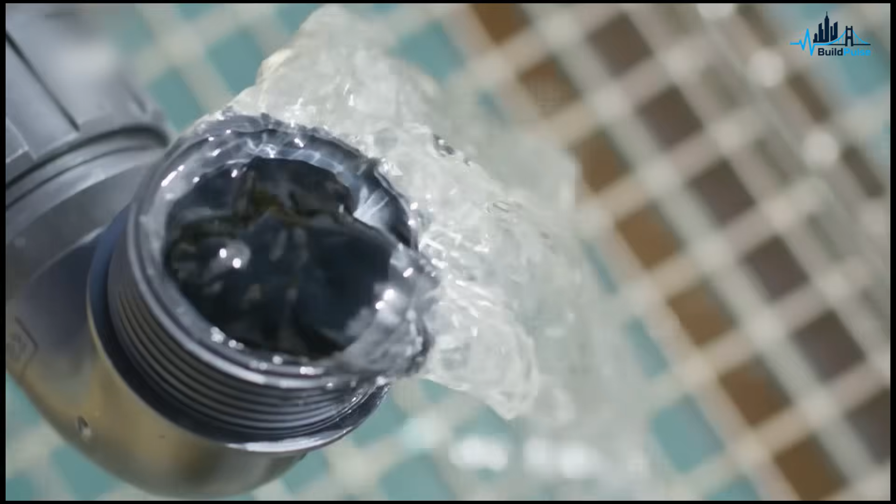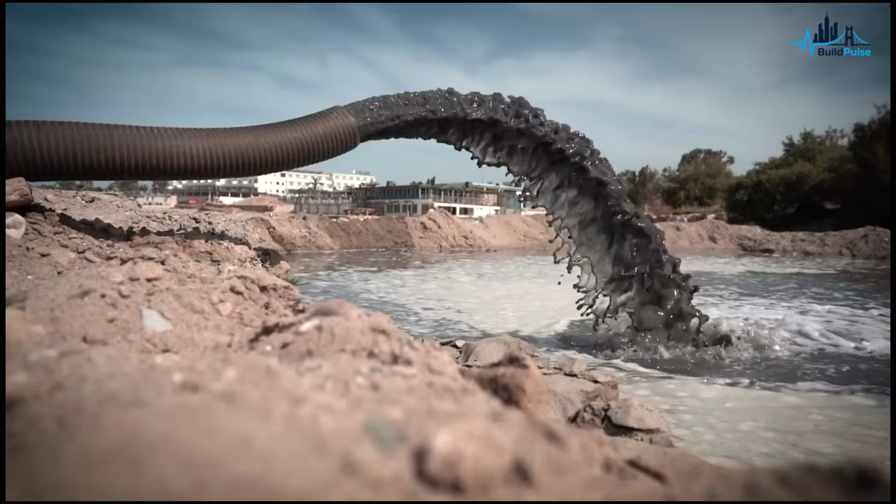And it ends with a question most people never ask when they look at the render: what happens to the salt? If NEOM answers that question correctly, at scale, on time, without the Red Sea paying the price, it will not just be a city. It will be one of the most consequential water experiments of the 21st century. If it gets the answer wrong, the failure will not look like science fiction. It will look familiar: a delayed district, a canceled plant, a scaled-down phase, a construction site waiting for utilities, a city whose most futuristic promise is limited by the oldest constraint of all: water.

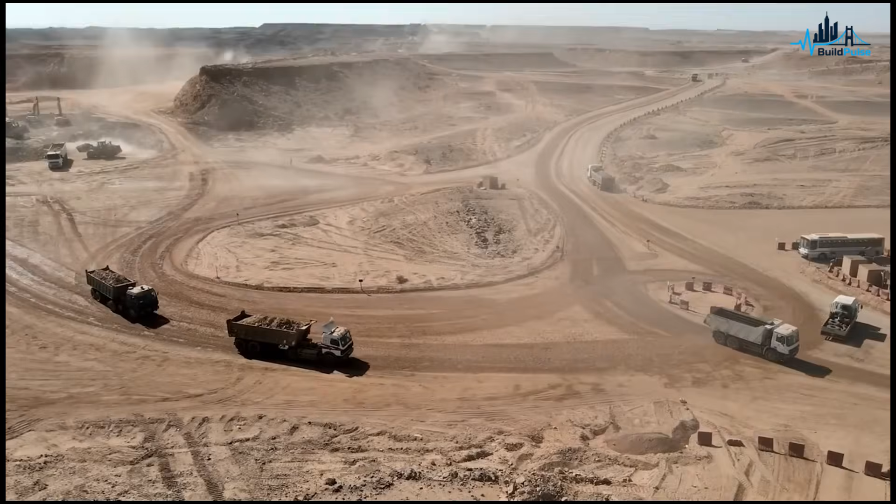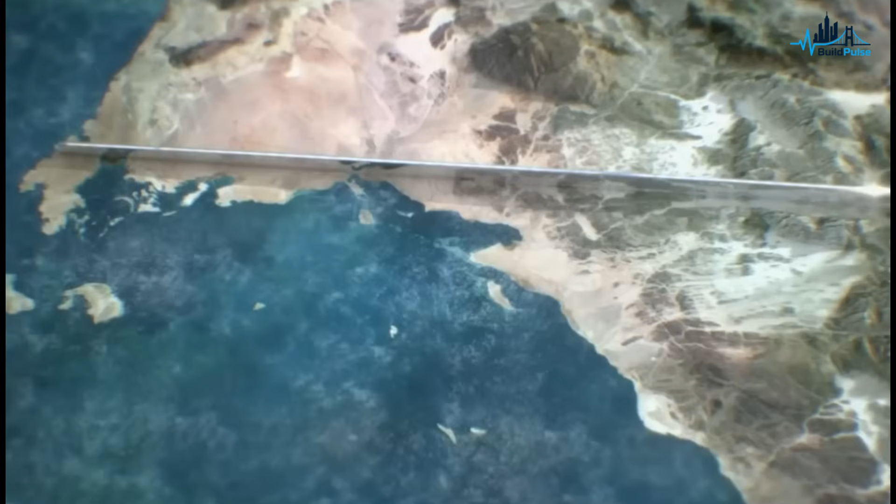NEOM may still become a new model for desert urbanism, but the model will not be judged by the mirror walls first. It will be judged by what happens every morning when people turn on a tap and expect something to come out. Because in the desert, the most important building is not the tallest one, it is the one that keeps the water running.